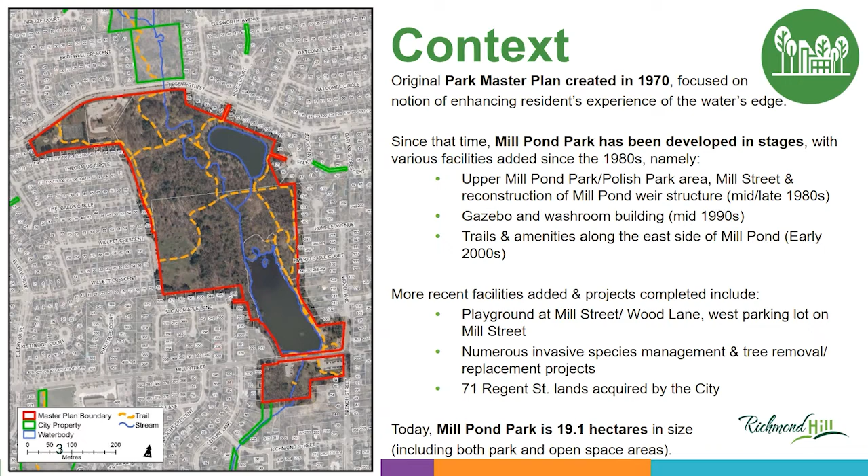We've completed a number of field investigations to characterize the existing conditions of the study area, including the cultural, natural environment, and technical engineering components. This presentation will provide a summary of our findings so far and some ideas we have to improve the infrastructure and valley land systems.

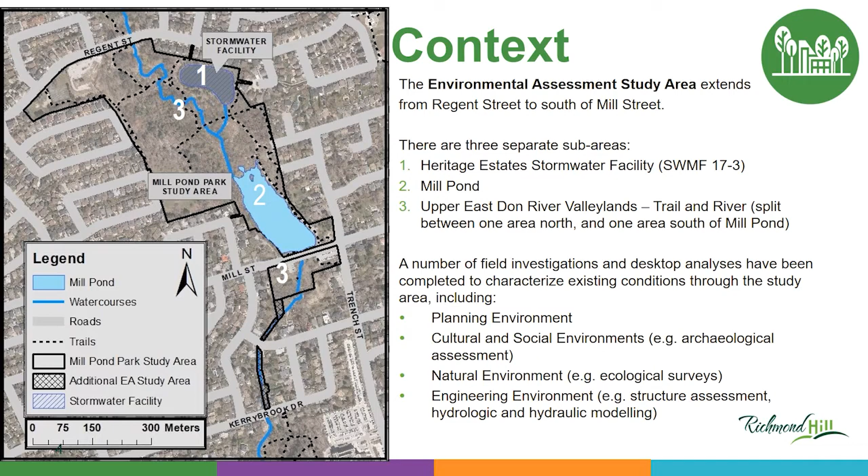This input will help us arrive at the preferred option, finalize the remaining technical studies, like the parking strategy, after which point we'll move forward with approvals later next year and into early 2023.

The next few slides summarize the key desires we're hearing from the public survey. Firstly, that the Mill Pond is beloved as a natural oasis in the heart of Richmond Hill for all the elements great parks have: great culture, great recreation, and great open space. Maintaining and enhancing these attributes will be key.

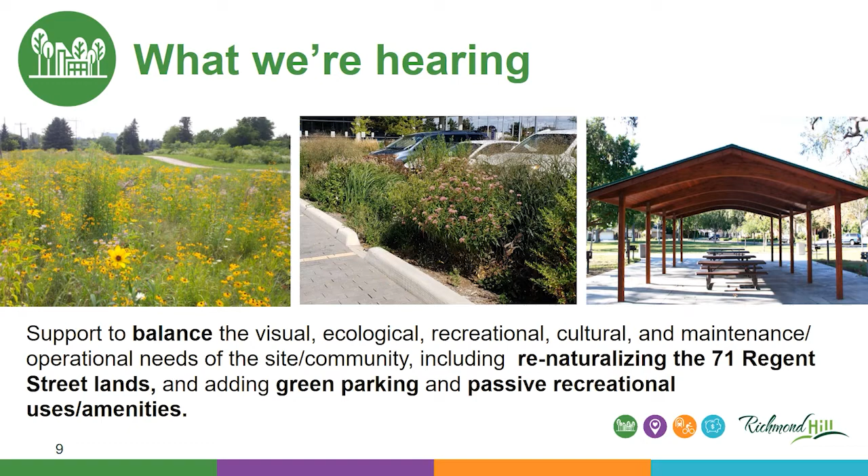The Environmental Assessment, or EA, portion of the study is being led by the Water Resources section at the City of Richmond Hill, with consultant support from TMIG and a team of specialist sub-consultants. My name is Ben Worth and I'm the Consultant Project Manager for the EA.

The objective of the study is to evaluate options for the rehabilitation of Mill Pond and the existing stormwater management facility known as the Heritage Estates Pond in the northeast corner of the park. The study will evaluate a number of options and determine the best rehabilitation solution to improve water quality, reduce erosion and prevent flooding in the area.

The study is being conducted as a Schedule B project in accordance with the Municipal Class EA process. The project is also being undertaken in close collaboration with the Mill Pond Park Revitalization Master Plan, further details of which are available later in this presentation.

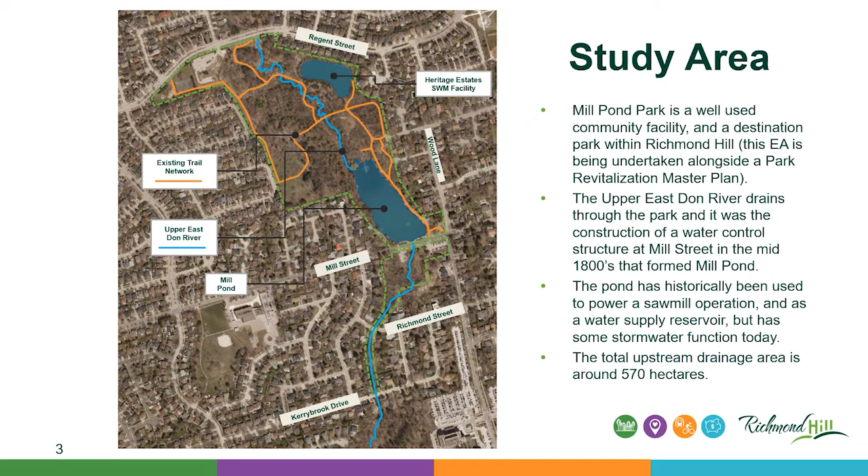The Heritage Estates SWM facility was constructed in the late 1980s to accommodate residential development to the north and northeast. The facility was designed to control peak flow rates and mitigate impacts on water quality in the Upper East Don River by detaining sediment and other pollutants from the residential area runoff.

Analysis of the facility indicates that it is still achieving target water quality objectives per current guidelines, but that it does not provide sufficient storage volume to meet current quantity control or erosion control guidelines. It is also noted that the configuration of the pond does not meet current design guidance in several areas.

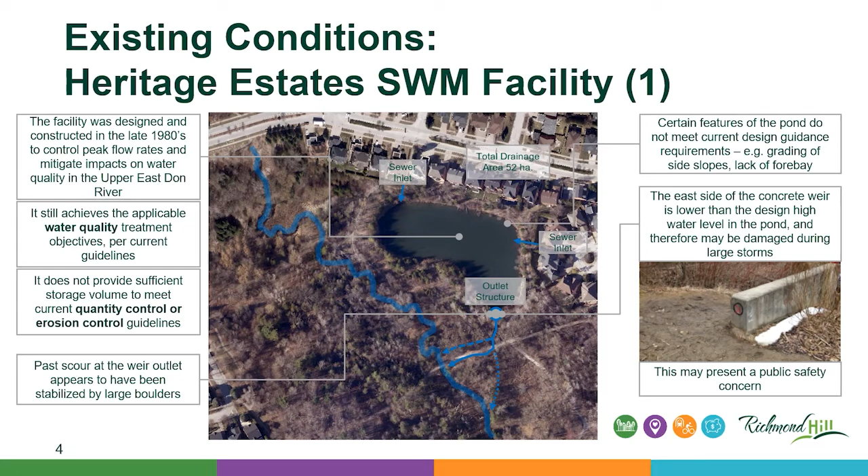Observations at the site also indicate that there has been some scour and erosion near the outlet, which needs to be remediated. Surveys of the pond indicate that it has accumulated around 2,000 cubic metres of sediment.

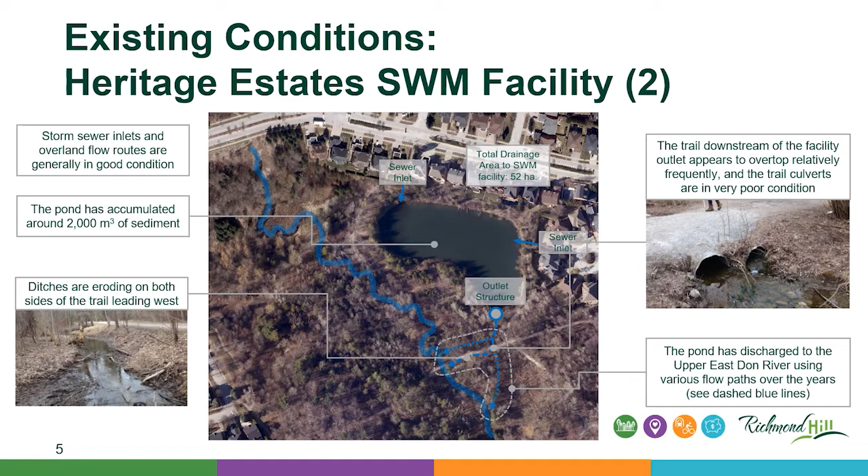Additional field observations include that the storm sewer inlets and overland flow routes are generally in good condition, and that ditches are eroding on both sides of the nearby trail leading west, and that the trail appears to flood relatively frequently. As noted previously, Mill Pond was formed by the construction of a water control structure at Mill Street for industrial purposes in the mid-1800s, and that the pond was not designed specifically to improve water quality and quantity.

It therefore currently provides only limited benefits in that regard. Surveys of the pond show significant sediment accumulation, especially at the north end, with an estimated accumulated volume of 16,500 cubic metres.

Amongst other things, this sediment accumulation is understood to be contributing to poor winter skating conditions. The concrete weir and culvert that control water elevations and outflow from the pond at Mill Street were observed to be in good condition. However, they are a barrier to fish passage, and due to the warming effect the sun has over the pond surface, Mill Pond contributes to elevated water temperatures in the river system downstream.

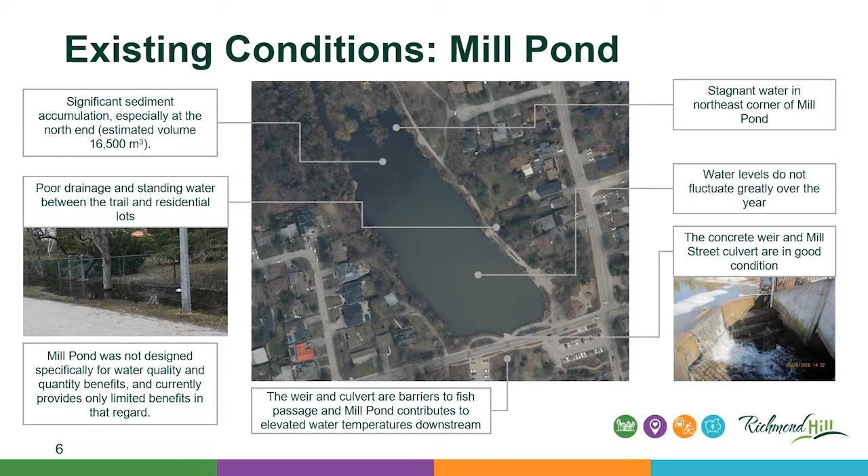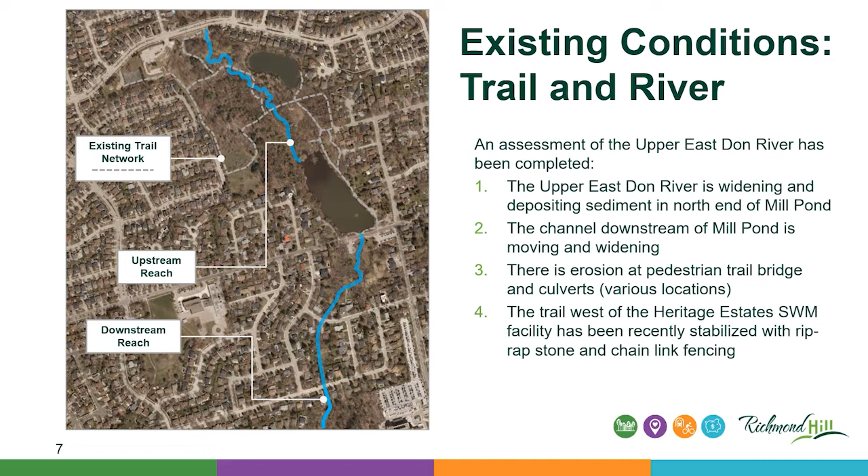An assessment of the Upper East Don River within the study area, both upstream and downstream of Mill Pond, has been completed, and the key findings are presented on this slide.

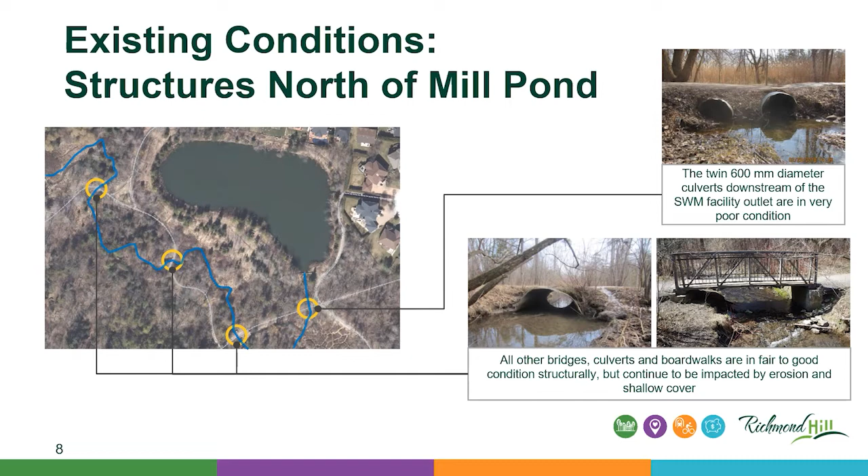Field inspections of the 4 existing watercourse crossing structures north of Mill Pond have been completed, and it was concluded that the twin 600mm diameter culverts downstream of the Heritage Estates SWM facility are in very poor condition, but that all other bridges, culverts and boardwalks are in fair to good condition structurally, although they continue to be impacted by erosion and shallow cover. There were 3 structures assessed south of Mill Pond.

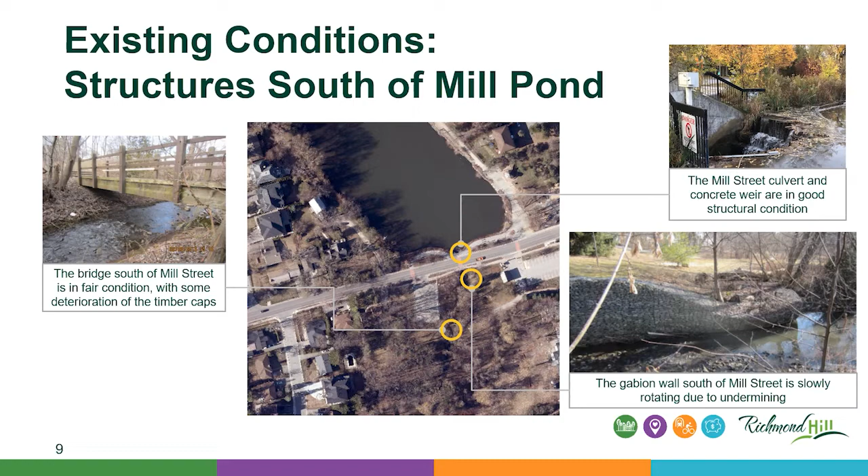Firstly, the culvert and concrete weir at Mill Street, which are considered to be in good condition. Secondly, the existing gabion wall on the east side of the channel immediately south of Mill Street. Inspections here indicated that the wall is slowly rotating due to undermining of the footings by flow in the river. Lastly, the timber pedestrian bridge further south was noted to be in fair condition, although some deterioration of the timber caps was observed.

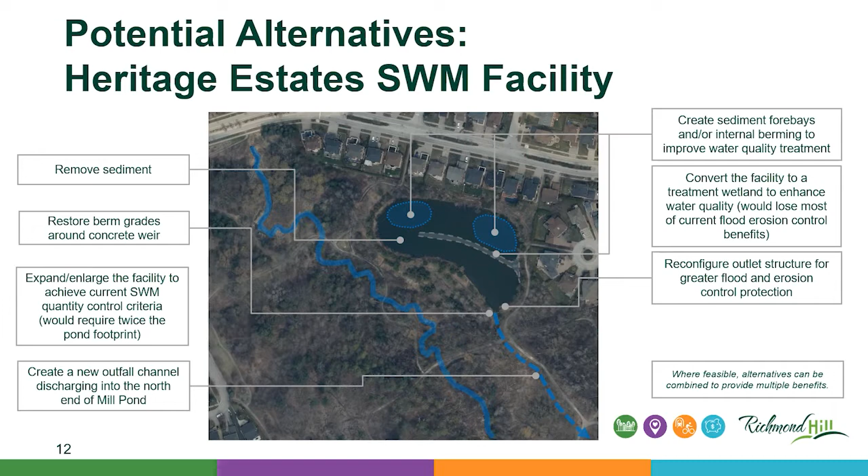The problems identified for Mill Pond include significant sediment accumulation that is negatively impacting the pond, both from an environmental perspective as well as from a public recreation function. The outlet weir and culvert at Mill Street present a barrier to fish passage within the system and contribute to warming of water that is released downstream. And stagnant water conditions have been observed in the north part of the pond.

Opportunities to address these identified problems would include removing the accumulated sediment, reconfiguring the northern limits of the pond, and modifying the outlet structure from Mill Pond.

Potential alternatives under consideration for Mill Pond include removing accumulated sediment to improve conditions, and reshaping the northern limits of the pond in conjunction with sediment removal to help improve flow circulation and minimise stagnant water conditions. This option could connect with the potential outfall channel from the Heritage Estates SWM facility, shown in blue, to improve conditions in the north part of Mill Pond.

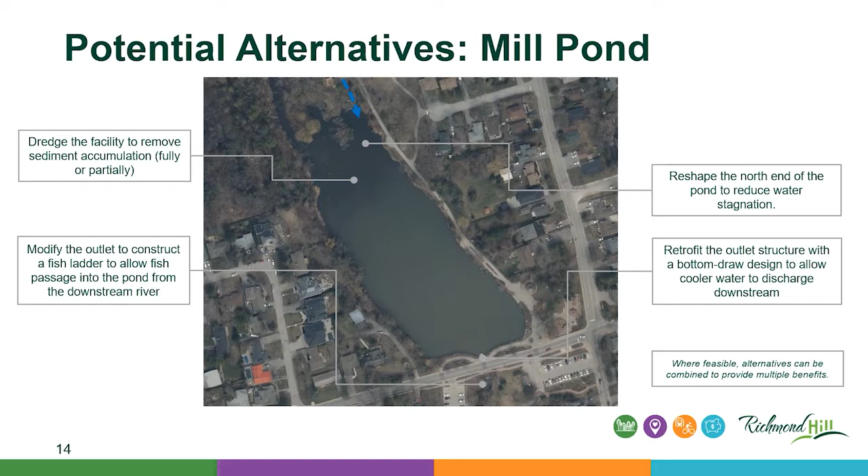The concerns associated with fish passage could be addressed through construction of a fish ladder feature below Mill Street. Finally, the water temperature impacts of Mill Pond could be mitigated through retrofitting the outlet structure with a bottom-draw outlet pipe, which would pull water from the lower parts of the pond where it is naturally cooler.

The problems identified with the portions of the trail and river system within the study area include deterioration of the riverbank in some areas, erosion and flooding issues at crossing points between the watercourse and the existing trails, and the Gabion Wall south of Mill Street on the east side of the river, which is slowly failing and requires attention.

The opportunities associated with these issues include repair or replacement of the failing Gabion Wall structure, reconfiguration of the trail network to minimise the number of watercourse crossings, and implementing a variety of natural environment improvements throughout the study area.

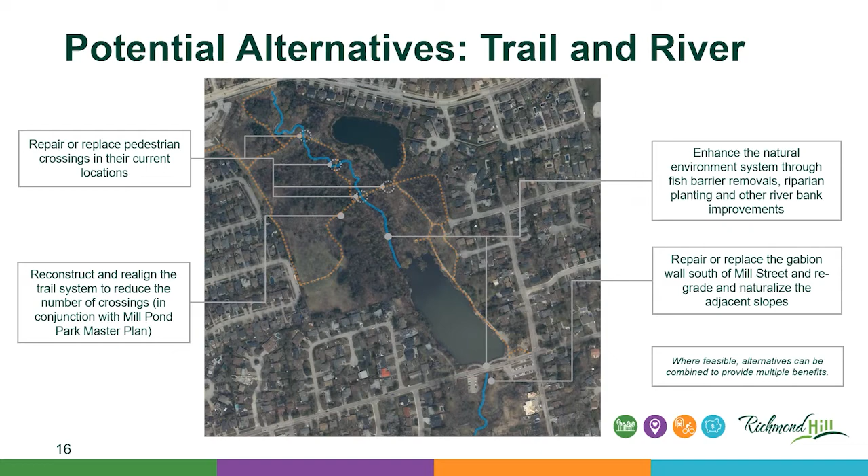The alternatives under consideration for the trail and river areas include repairing or replacing pedestrian crossings in their current locations, working with the park's master plan team to reconstruct and realign the trail system to reduce the number of crossings and minimise disturbance to the river system, enhancing the natural environment through fish barrier removals, riparian planting and other riverbank improvements, and finally repairing or replacing the failing Gabion Wall structure south of Mill Street, or removing it entirely and regrading the surrounding area to avoid the need for a retaining structure at all.

That concludes the presentation of work completed to date on the Class EA study.

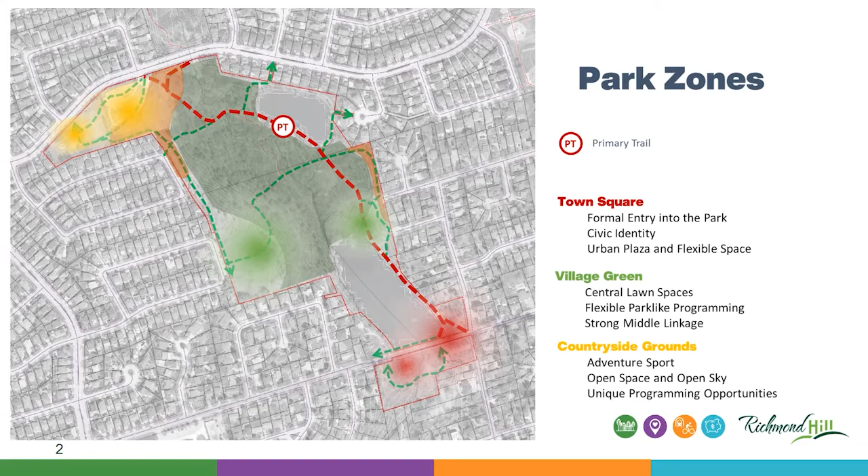Option A, titled Adapting Landscape, is really a light touch on the existing park, which overall revitalizes the main park components in their current location.

This option also provides an overall improved circulation pattern through primary trail alignment and improves the secondary trail network. There is also a modest parking lot and supporting program provided by a new gateway feature into the park from 71 Regent Street in the north end of the park. Ian will explain more of the park features in further detail.

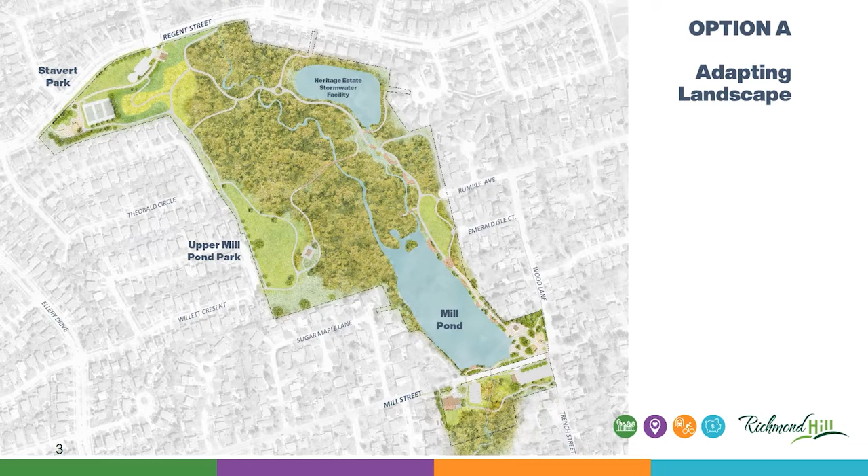So now we'll present a more detailed look at Option A, the Adapting Landscape. First, looking at the town square area of Mill Pond. As indicated, this approach focuses on the revitalization of the existing features of the park and retains the natural attributes and character of the Mill Pond Park.

Area 1 proposes the renovation of the existing Mill Pond Gallery, providing improved gallery space functions and improved operation support. It includes a south-facing terrace and expanded pollinator gardens and park space.

South of Mill Street, an improved accessible walkway links Trench Street, bridges the creek, and links to Mill Street at the west end of the park. The existing washroom buildings will be renovated and expanded. The Millennium Gardens are also proposed to be expanded.

North of Mill in the town square, a new park arrival entrance is proposed that better links the main park trail to a safe intersection crossing for pedestrians at Trench and Mill.

The parkland includes improved paved zones for supportive events, landscaped areas for shading and tree protection, and the restoration of the park gazebo. A lookout area at the edge of the pond creates a scenic seating terrace that also supports winter skate change, staging, and operations access.

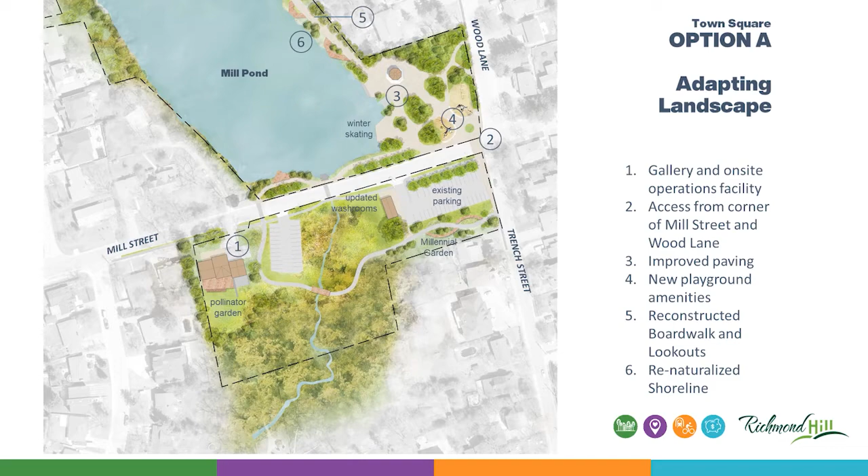Existing playgrounds will remain in their current location. Northward along the pond, a series of seating lookouts are proposed with enhanced natural shoreline edges.

In the village green in option A, the main trail runs northward along the mill pond edge, featuring a series of passive seating areas along the water's edge. The eastern green, area 4, provides needed open space and lawn as a more urban picnic zone.

Further north, a new natural creek channel connects the Stormwater pond with the mill pond, continuing the main trail with lookouts over the water's edge landscape.

In the central area, a new boardwalk feature in place of the existing on-grade trails supports a connected and protected ecology. The Upper Mill Pond Park to the west retains the open park setting and creates a main trail circuit along the perimeter of the space with connections aligned with the local sidewalk network.

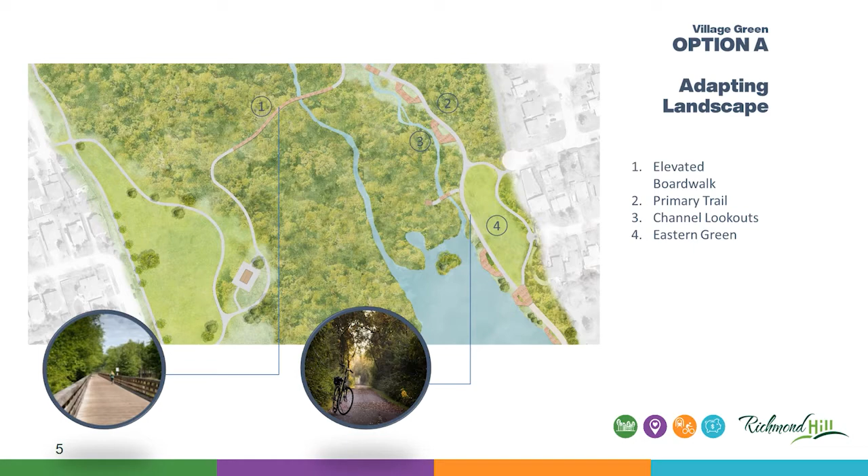In the countryside grounds at Regent Street, option A builds on many of the existing features of the existing site and also integrates new parkland with Stavert Park.

Area 1 illustrates improved playground facilities with better walkway and seating and connections to Regent Street. A gateway feature highlights the park entry. A new small parking area and drop-off uses previous road access patterns to establish new in-park green parking.

Utilizing existing infrastructure, a washroom building, information kiosk, and operation support is proposed at the northeast corner of the park. The park features a top-of-bank walkway with seating that overlooks the proposed meadow landscape in the valley.

The open main lawn along Regent Street creates additional parkland space and an opportunity for temporary optional skating areas in the winter.

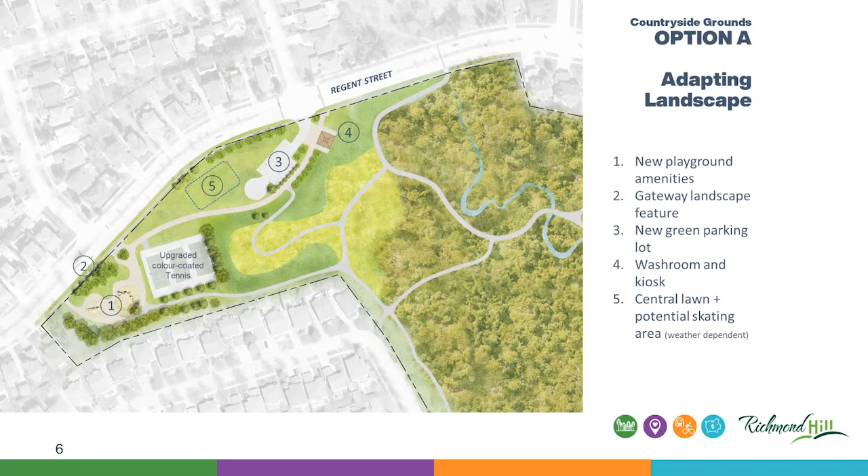Option B, titled Pond Destination Landscape, is similar to option A in the sense that it protects and enhances the existing natural heritage footprint. However, option B also anticipates an increase in park goers with intensified uses that are centered upon the 3 park zones.

Therefore, one of the main differences between option A and B results in spatial changes to some of the park facilities, introduction of new park facilities, new lookouts, and secondary connections. This includes a new bridge linking the primary trail from the north end of Mill Pond to a secondary trail up to Upper Mill Pond Park.

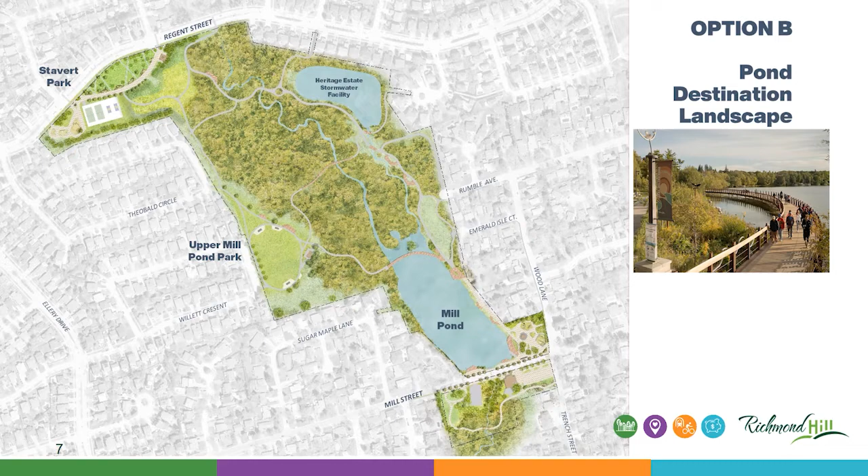Ian will explain some of the finer details.

The option B destination landscape focuses on the revitalization and the addition of park features and park components to enhance the natural attributes, ecology, and character of the Mill Pond Park.

In the town square area, Area 1 proposes the creation of an open space parkland, sculpture, and pollinator garden. South of Mill Street, an improved accessible walkway links Trench Street and bridges over the creek, extending further southward to create a longer trail loop, arriving at the west edge of the park at Mill Street.

The plan features a new focal point, a central park building at Area 5 that includes a new art gallery, expanded washrooms, actors' change areas, heated area, and indoor and outdoor cafe, as well as a lower level operations center.

North of Mill Street in option B also proposes a new, safe pedestrian entrance and park arrival and gateway area at Trench and Mill Streets.

The parkland includes improved paved zones for support of events, landscaped areas for shading and tree protection, and the relocation of the park gazebo into a central area to better support park events.

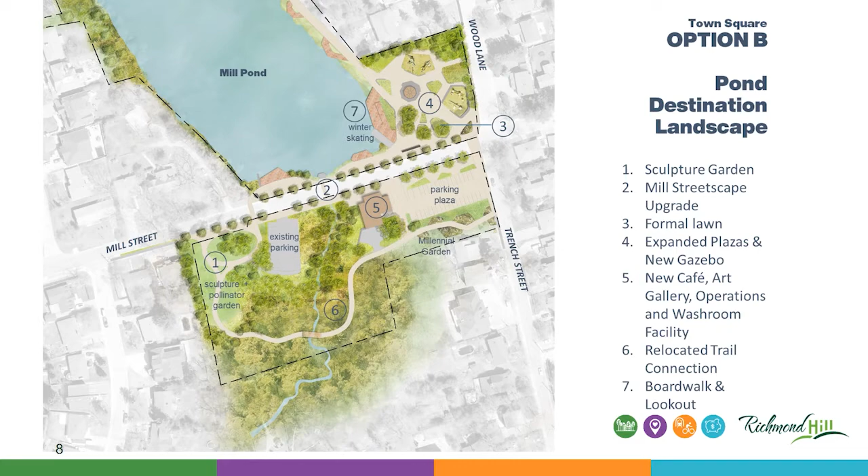In the village green in option B, the main trail runs northward along the mill pond edge, featuring a series of passive seating areas overlooking the pond. In Area 4, an expanded forested area is proposed to further expand the forest canopy area.

A key feature of option B is the pedestrian bridge at the north end of the pond that allows strategic east-west connections as well as scenic views south over the pond. A trail connection in Area 6 will complete this strategic pedestrian link into the upper Mill Pond Park.

Further north in Area 3, a new natural creek channel connects the Stormwater Pond with the Mill Pond, continuing the main trail with lookouts over the water's edge landscape. In the central area, a new boardwalk feature in place of the existing on-grade trails supports a connected and protected ecology. The upper Mill Pond Park to the west retains the open park setting.

It creates a main trail circuit along the perimeter of the space, with connections aligned with the local sidewalk network. A circuit loop with seating and fitness stations is proposed surrounding a central green.

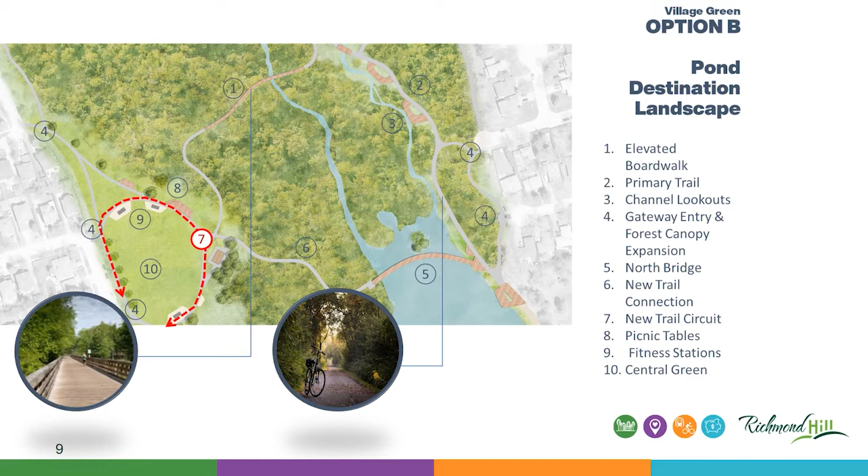In the countryside grounds at Regent Street, Plan B builds on many of the existing amenities, integrates new parkland with Stavert Park, and adds additional features to the north side of Mill Pond Park.

Area 1 illustrates improved playground facilities with expanded play facilities, improved walkways, and seating and shading.

Utilizing existing infrastructure, a washroom building, information kiosk, and operations support area is proposed in Area 4 at the northeast corner of the park. The park features a top-of-bank pedestrian promenade with shaded areas, seating, and lookout points over the new meadowlands in the valley area.

Area 8 indicates the expanded court area with 2 tennis and 2 pickleball courts. The open main lawn along Regent Street creates additional parkland space and an opportunity for temporary optional winter skating. Area 3 illustrates an adventure climbing and sliding structure using the existing valley slopes. Parking will remain as on-street parking along Regent Street.

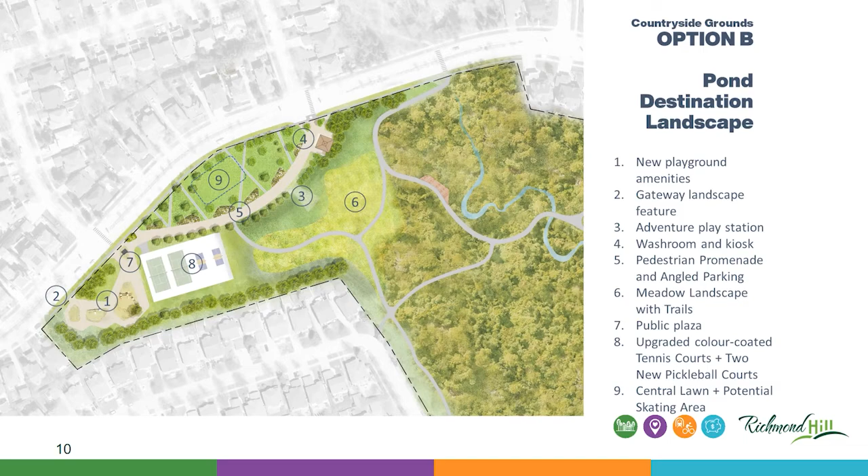One of the key experiences upon entering the park often comes from the corner of Mill and Trench Street. This illustration shows how options A and B will improve the overall entry into the park from Mill Street and Trench. This creates a more inviting entry into the park and creates a dynamic gateway and a balance of landscape features and hardscape to allow for a flexible interpretation of the space.

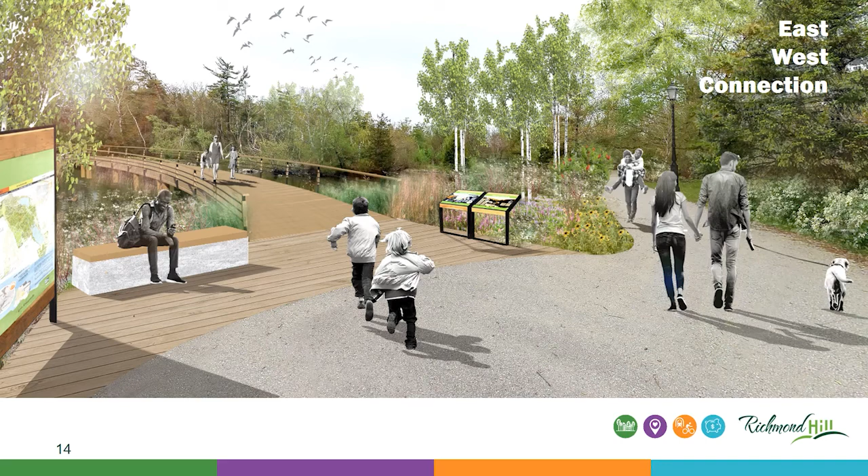This conceptual visualization helps to illustrate how the bridge connection can enhance east-west connectivity over the water in a way that is sensitive to the natural heritage features. Discussed with the city and TRCA, this approach can help reduce pedestrian foot traffic along the north shore of the pond and discourage unwanted disturbance of ecology.

This is particularly important as we anticipate wider usership of the park. The bridge is also an entry and a new focal point that can provide educational signage and wayfinding.

The master plan has also given us an opportunity to think more about some of the most cherished parts of the park, including some of the trails that bring us out of the city and into nature.

The revitalization of the trails provides us a unique opportunity to rethink these cherished spaces by elevating the walkway and allowing for linking of the ecological zones that may have been bisected by the previous trail network.

This also provides removal of invasive and diseased species and restoring them with native trees and plant material, going to further restore the urban forest and increasing canopy coverage. This will essentially reinforce the health and the natural heritage system through this part of the East Don watershed.